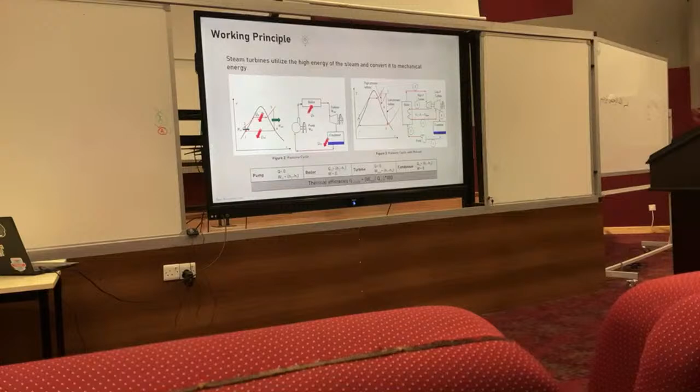Okay, Shabab, let's share the conversation. There is another question on the board. The application, where do you think this steam turbine is used?

So we start there: produce electricity. So in the electrical application, it is relevant. How does it produce electricity? Change the motor, receive the work, change it to electricity. The motor receives the work from where? From the turbine. Okay, good.

And anyone else want to try? We're going to limit to two for this one. Single stage turbines used in the industry or the plants as an alternative to motors. Excellent, both answers are very correct. Give them chocolate, they covered it very well. I cannot fault them. They got the fundamental definition of a steam turbine and the ways it's applied. That is correct.

Okay, right, we're still on the working principle. I won't be long here. So it is used as a prime mover because the gentleman started by saying there is mechanical energy available in the shaft of the steam turbine. So we take advantage of this mechanical energy he was talking about.

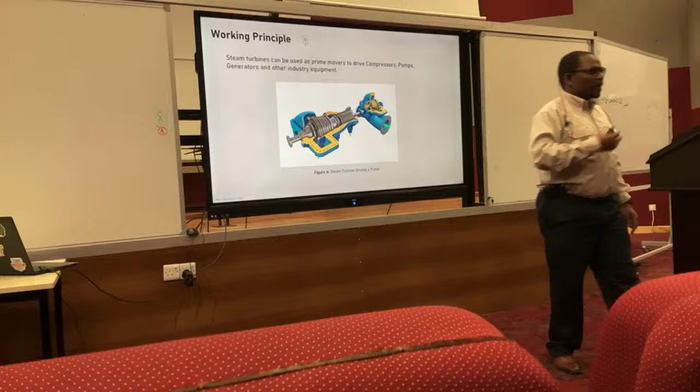We're then able to drive a centrifugal pump. We can also drive a compressor. We can then drive a generator. Now, depending on where the steam turbine is used, whether for power purposes, to propel a ship, in a nuclear boiler system, or a gas compressor, a steam turbine provides an option because the mechanical torque or mechanical energy is available.

So what you see in the picture is just an open, cutout drawing. These are the steam turbine blades, and you're all familiar with this, the impeller, this is a centrifugal pump. Later I will cover this in detail, do not panic, I'll get to the component.

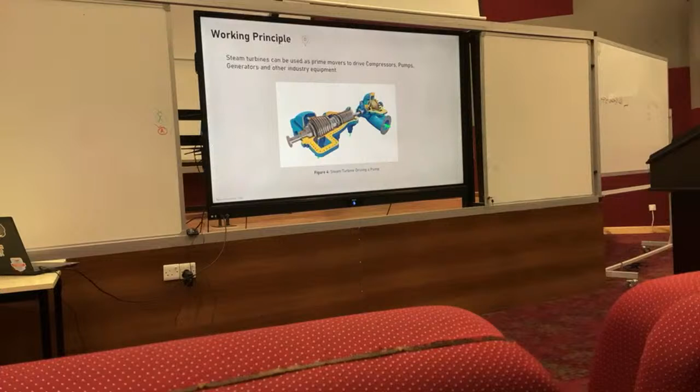Again, I won't be long, I think we all got the principle down. So I'm just showing another process flow diagram, how the steam turbine receives the steam from the boiler. In industry, we say it's coming from the high pressure steam header because the source of this high pressure is a boiler. Then we channel the steam into the turbine.

To get the steam, we have to go through the inlet valve. We've got the control valve, we've got the trip valve, then we've got a nozzle. Later you will get the knowledge of what this nozzle does. I'm sure you more or less got an idea.

Why I'm showing this, I just want to cover these three valves quickly before I go to the low pressure side. I want to cover the high pressure side with you quickly. The first valve you see, the inlet valve, is normally used during maintenance if we want to isolate the steam turbine.

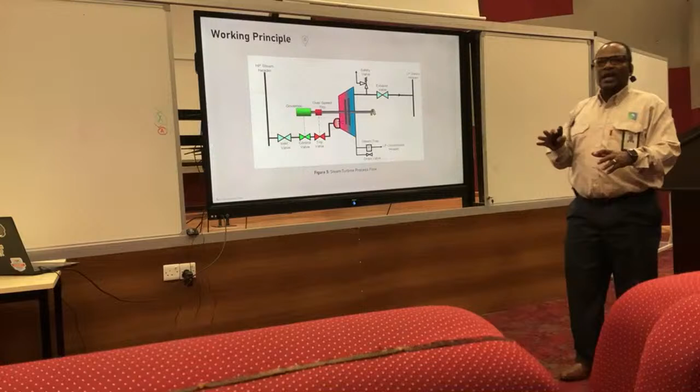But the next two valves, the one in the middle, we use to load or unload the steam turbine. There can be a case where the demand of the torque we talked about is not needed. So we tell the turbine, look, the demand is low, please reduce the steam consumption. It's such a flexible driver that we can regulate the steam consumption using the control valve.

The next valve is a no-go, it's called the trip valve. What it means, I'll put it another way and explain later. Think of a steam turbine as a crocodile. A steam turbine in industry can be a crocodile because most of them run at quite high speed, and if the speed gets out of control, you need to run away from the steam turbine because a disaster could happen in a minute or a second.

That valve design is very important because when it sees that the turbine is no longer controlled in terms of speed, it can immediately shut off the steam. Normally design engineers make sure that valve is almost on the chest, on the body of the turbine, so the volume of steam can be immediately cut down and shut off completely. We kill the torque, then we kill the speed. That is how we stop a steam turbine.

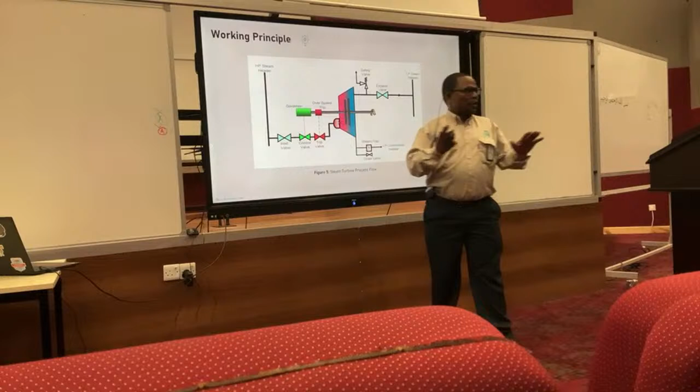Normally we do not want to stop a turbine this way, but this is an emergency when we are failing to get the turbine back into control. This is our last line of defense. Later I'll cover how we stop it normally under controlled conditions, when a decision is made to stop a turbine. There's a proper way to stop it, but that valve I'm explaining is for safety reasons.

Is the trip valve an electrical instrument or mechanical? That's a good question. This valve is normally linked with instrumentation, with very intelligent algorithm software, because in milliseconds it must stop the steam. The moment it gets activated, that's its job. But when the turbine is still under control, that valve is fully open, the turbine is happy and receiving steam as normal. It does no control on the steam. The owner of the control, this one, loads and unloads the turbine. That's why it's called a control valve.

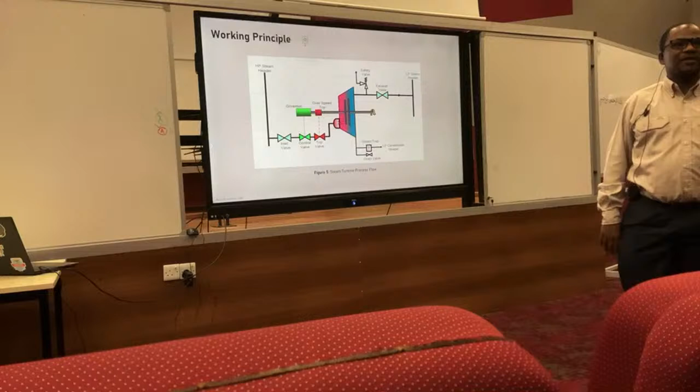When we pump the fluid, the steam, and get it to the turbine, and the control valve decreases the amount of steam, isn't that a waste of energy? There is steam available at the head of the valve, a mechanical valve fully open, but here we want to regulate the load. You cannot always think of it as a waste, it's still in a closed loop. All we're doing is using energy according to demand. This is an advantage a turbine gives us. We are not wasting the steam, but we are telling the boiler we do not want that many tons of steam at that pressure. We need a little bit lower because the compressor may require a lower load, or a generator requires it, giving engineers flexibility without wasting steam.

Okay, we good? That's the reason I want you not to forget the valve. We will get into the component later on.

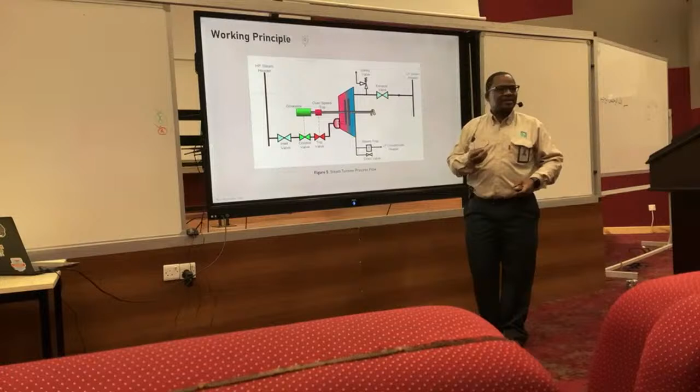Then when the steam is done, when we've extracted the energy from it, we return the steam to a low pressure system. If you saw the first picture, the principle, we could be returning the steam to a condenser and then back to the boiler. So this is really a line receiving low pressure steam. Later I'll cover all these auxiliaries, like what is the function of a steam trap in a steam turbine. And then I'll cover the nozzle also in detail. I'm just giving you a flavor of how steam flows from a boiler to the turbine.

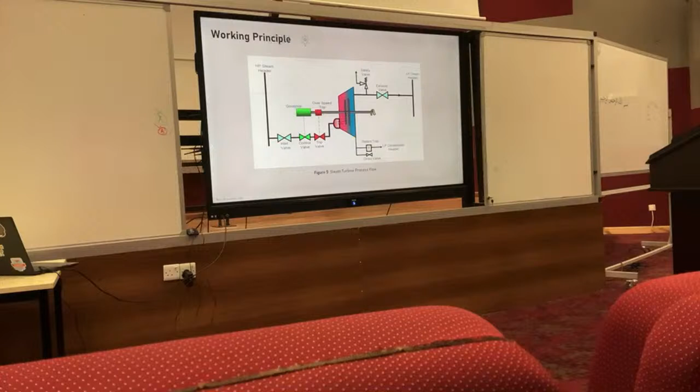So what do we think? I explained a little bit about the steam turbine, we covered the principle. Do you think it's similar to a centrifugal pump? Do they do the same thing? Who wants to give it a shot?

And when you give an answer, tell me if you say they're similar. Oh sorry, we have an answer. Okay, I forgot you already. We're going to choose right, yeah you can go ahead.

The turbine acts like a reverse for the pump. The turbine takes the rotational motion of fluid and puts it into rotational motion of the shaft. But in pumps, the reverse is happening: you take the rotational motion of the shaft and transfer it to rotational motion of the fluid.

To the fluid, okay, hold your thought, next try. Yes go ahead. Turbines deal with steam and pumps deal with the liquid phase. But the working principle, do you think it's the reverse? I want someone who can explain how it's the reverse, who can try? Turbine consumes the energy, but the pump instead puts more energy by increasing the pressure. The pump increases energy by increasing the pressure, it adds energy into the fluid.

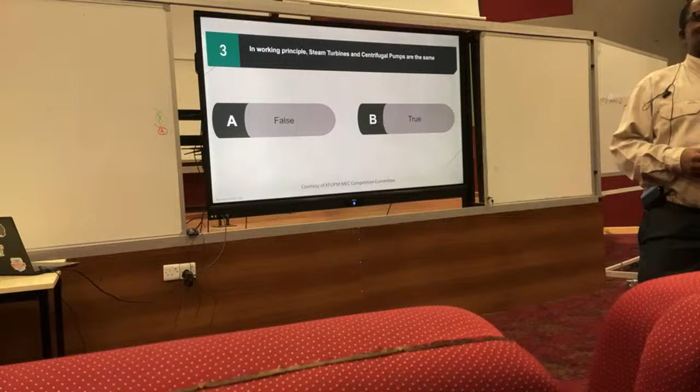Thank you very much, I think he deserves a chocolate, he really put it in thermofluid terms. A steam turbine is consuming steam from the boiler and then generates energy. The pump does the opposite: it puts energy into the liquid so we can go from inlet pressure to high pressure. The turbine is the reverse, it extracts energy from the fluid. Yeah, we get it?

Oh, I need to click the right answer from the laptop. Oh, from the laptop, sorry. Yeah, we're getting old with the technology.

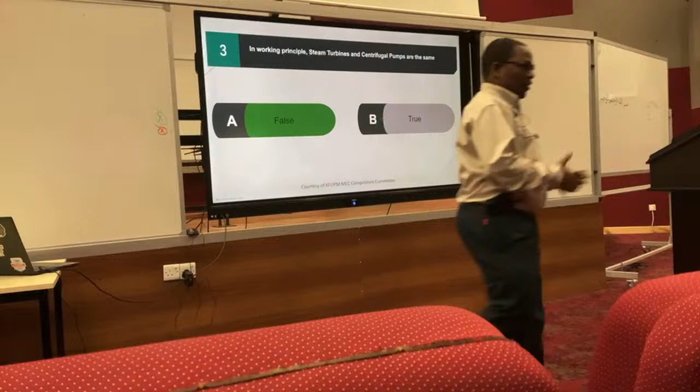Did it change the color? Right, so they are not similar. I'm just confirming he answered very well from a thermodynamics perspective.

Okay, we covered the components. So we did explain this. I'll try and take you through all the components of the steam turbine.

So what you see here, we have a shaft. We're already familiar with the rotor, we call a shaft. This is called a disc. Not sure, let me try and see if the laser can work.

So you can see, okay, it doesn't work on the screen. Let's try this way. This is a shaft. This is a disc. At the periphery of the disc, you've got the blades. These are the blades. You will cover them in detail later.

You've got a casing where you house the disc. You've got the seals where you prevent the leakage of the steam. It's a very expensive commodity of energy. We don't want to lose it. We want to contain it within the turbine so we can extract more energy.

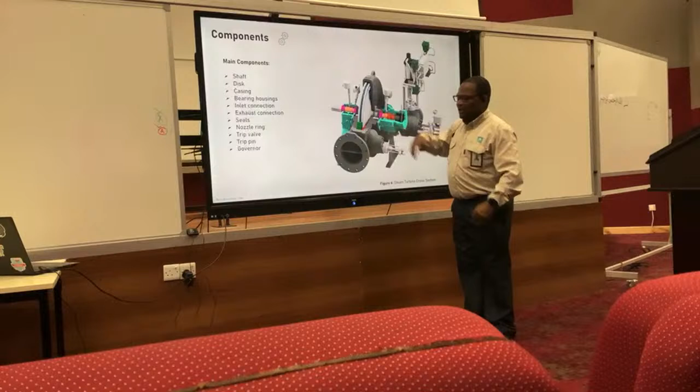Then you've got the bearings. They now support the shaft. The bearings have oil. This is a bearing housing, it has oil inside. We don't want the oil to go to the steam, so we put a seal to prevent the oil, and we have a seal to prevent the steam.

So we have a speed sensor. This is like gear teeth at the end of the shaft. This is your speed sensor, to measure or monitor the turbine RPM. Why? You saw that, you remember the picture with the red valve. This is important. Any turbine that we operate, it's important to keep track of the speed.

And then this is your control valve, your trip valve, control valve. We're telling it, this is how much load we now need, so that the torque available here can meet the demand. Then I go back quickly to the component.

I've covered the seal, the exhaust. So low pressure steam, connected by a pipe, we take it back to the condenser. High pressure steam on the other side, that flange, that is called the inlet connection. The steam is coming from the boiler. I've covered the bearing, I've covered the trip valve, and then we have a governor.

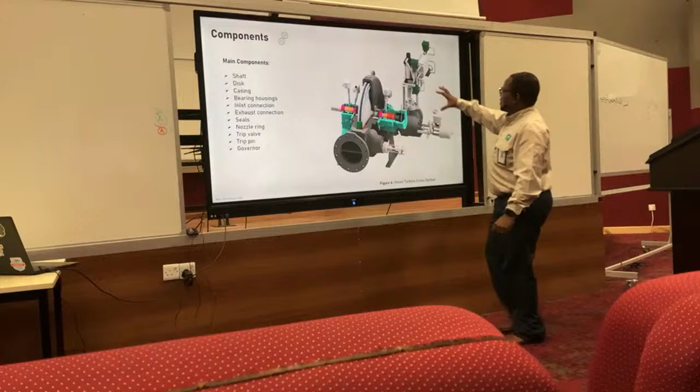This is a governor valve. Later on I will go into detail. And then inside here there's a special device, very important, called the trip pin. I'll cover again how it works. Basically it's the last thing - when all this instrumentation fails, then it's more like a mechanical trip.

So you can see already that we're all worried about the speed of the steam turbine. We want to control the speed because, as I said, if we don't control the speed, things can quickly go wrong. Is there any question on this, on the previous component? Was I too quick with the components, or is it okay? It's okay.

Okay, now we look at the classification. I'll go through it quickly. Turbines are classified as general purpose, special purpose - I'll explain quickly what that means. Then we'll look at the number of stages, single stage, multi-stage, and I'll cover the concept of why we have it like that. Then we've got condensing, back pressure, extraction - I'll explain that. And then compounding, I will touch on that as well.

And then the types of governors, I will explain. And then we'll look at the impulse and reaction blades, and cover how an engineer decides which blade to use, which one not to use in a certain application.

I keep using the word engineer because in my future, when I see all of you, I see our future Mohandis. This will be all relevant to you in your future. If you do well in your examination, I'm sure you will do well. These are the things that will start helping you with your career decisions as well, okay?

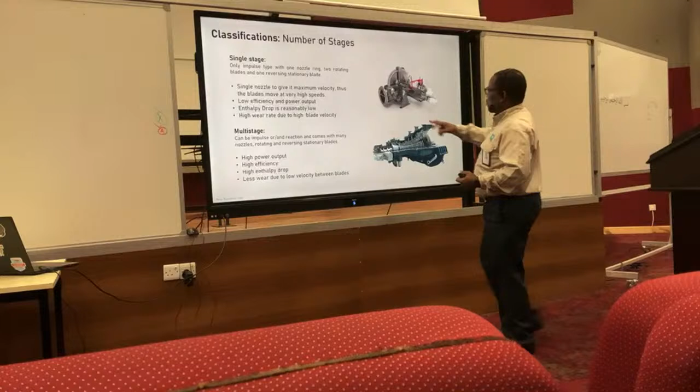Okay, we are on the stages now — single stage or multi-stage, that's how you can classify. There's a limitation on the single stage, normally it has one nozzle. Sometimes what we do, what you see here, we call it hand valves — these valves on top of the control valve going to the steam. Sometimes when you want to maximize a little bit more, we either fully open these valves as well to let more steam, or channel the steam more around the disc to get more torque so we can fully utilize the steam. Really, a single stage is limited — it has one nozzle ring and the disc runs at high velocity, and you will see that later on.

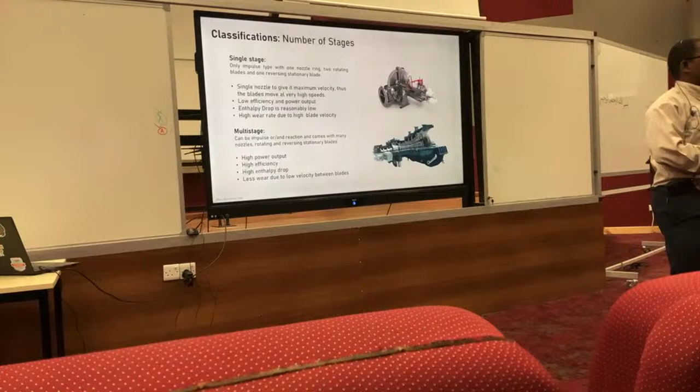Then we come to the big boys, we call them multi-stage. We call them multi-stage because they are designed for high power, high efficiency, and huge enthalpy drop. When we say huge enthalpy drop, it means we maximize the energy. We sweat the steam, we consume the steam that the boiler provided. Then this turbine is able to deliver the torque that is required. How do we achieve this efficiency? You have a number of blades, so you create pressure drops and velocity changes so that the power from the turbine is really fully utilized.

Later I'll get a bit more into detail on multi-stage and all the blades in the turbine. But the picture you see on the right below, you start seeing a big specialized steam turbine. So far so good?

Is there anything else we need, did that answer it a little bit for now? You will see the calculations later, but you get the feel for how we get high efficiency on a steam turbine.

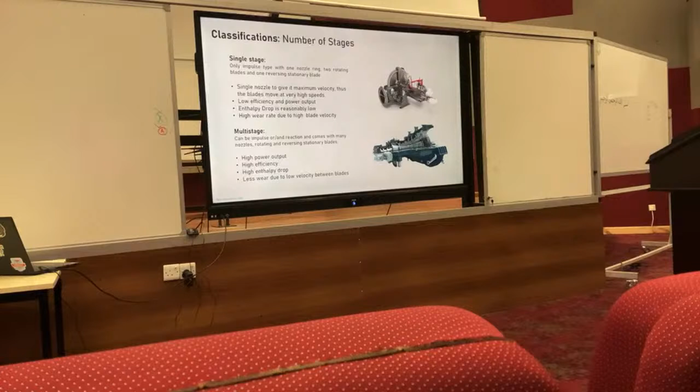Single stage again, these are just components. I stress again, as a single stage turbine, we have one disc or one nozzle ring. We are limited with the torque. We are generating the torque required for that specific need, but if we want to stretch it higher, we then need to consider multi-stage.

I think I covered the components. I can recap if you still remember. This is a bearing housing. There's oil, we've got seals. These sensors, this one could be a temperature sensor on the bearing, so we are monitoring the bearing.

The other one coming at this angle, we could be looking for vibration. So there are some sensors other than just speed, we can also try to monitor the vibration of the whole steam turbine. I'm not sure if there is more.

I'll cover the reversing segment on the blades later. This component helps the first blade that received the steam transfer that profile again to the next blade. That's why we call it the reversing segment, it helps transfer kinetic energy to the next blade.

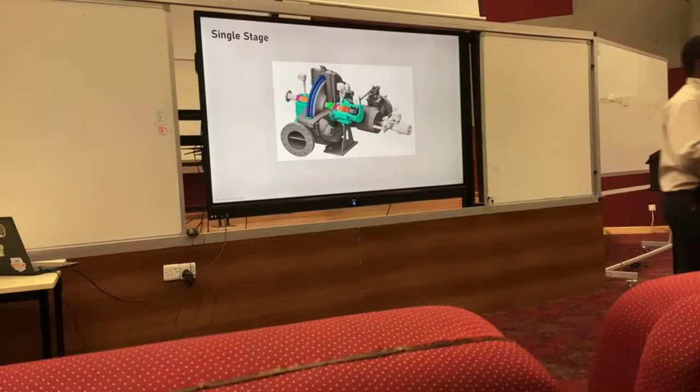Is there anything maybe that I didn't cover here? I did mention these are hand valves, or sometimes some turbines have an option to put hand valves, so that's why you don't see that. This is used to supplement and maximize the torque available by bringing more steam into the turbine.

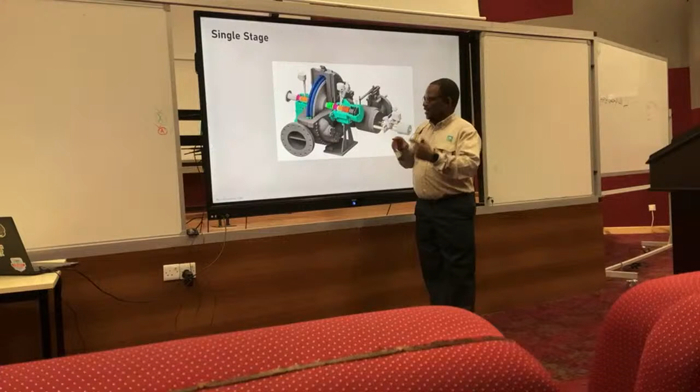What is the nozzle? Maybe because of the pictures, I'll explain it later on. The only way to identify where the nozzle is, you see the steam enters here and takes this direction to the turbine. There's another drawing coming where you'll see nicely how that nozzle ring sits in front of the disc, because it has to control and channel the angle of the steam so you can strike the blades optimally to get your kinetic energy when you need torque.

Is there a question, Shabab? Does somebody have a hand up? Is all good so far?

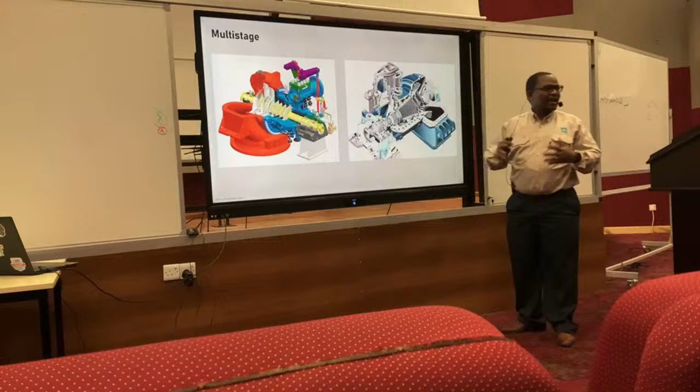Okay, multi-stage, we've explained again, so you can see the shape of the turbine, tapering in. I will explain what's the secret behind the shape, but one, two, you can see now the blades, you can start getting a feel for what we mean by multi-stage, and why it's called a multi-stage.

What you see here and here is the control valves, they are in the body of the turbine. I did explain it's easy to control the steam this way. Also, the trip valve is mounted, we call it a chest, the steam chest.

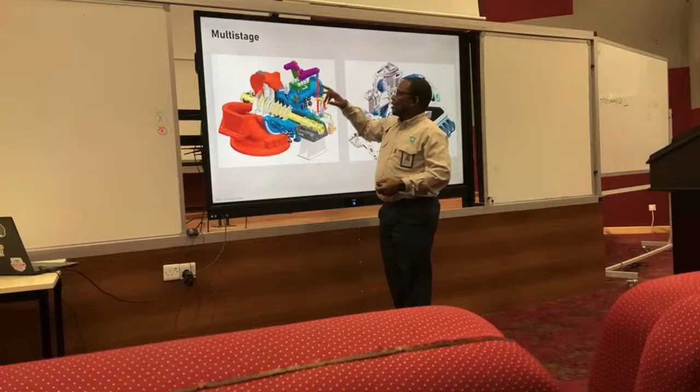It's also used so that when something goes wrong and we want to take action quickly, within a second we cut out the steam. You can imagine if this valve was in this position and we have to immediately stop the turbine, when we trip, there will be steam trapped between the turbine and the valve. This steam will continue into the turbine, and since it has energy, it will continue spinning the turbine, which is the last thing we want when the reason is to stop it. That's why engineers mount it directly into the body of the turbine, so there is no volume of steam available when you have to stop.

Is that clear? Okay, any questions so far? Are we all good?

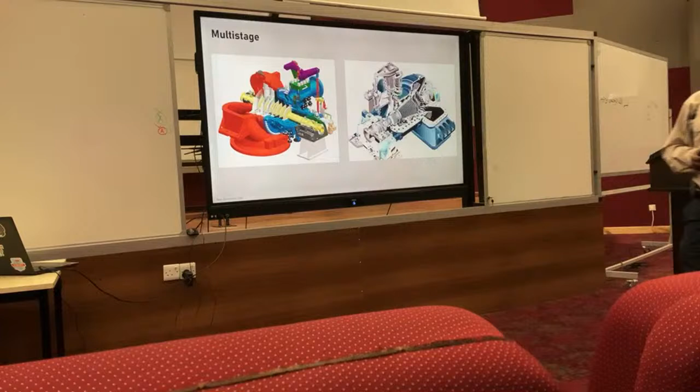Because the pressure at the beginning is higher than at the end. So why is the blade long? Yes, very good, the pressure inlet is higher than the pressure outlet. But why is the blade at the end long?

Not far, not far, so you need to trust yourself. I think you got the concept. Why then is that blade longer?

I wish I can give him half a chocolate, but I'm not allowed to cut the chocolate. Go for it, give it a shot.

At the last stage, the pressure will be little compared to the beginning of the turbine. And if the pressure is low, it is harder to extract the energy. So you make the blade longer in order to extract the energy.

Give it a try, the last one. I think it's because the volume of the steam expands, so we need to expand the chamber of the turbine. Excellent, please, we'll limit to 3 for now.

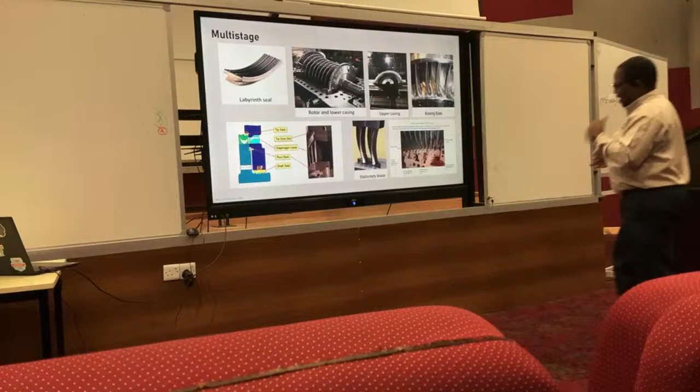Okay, I will wrap up very quickly here. I'm just emphasizing the component on the multi-stage that you will find. You will find the seal, what you see, the labyrinth seal.

Again, a very expensive commodity, high efficiency. We don't want to lose this, we don't want to lose the steam, so we use this seal to prevent any leakages.

So if you want to see it more clearly, the steam can go through at the top of the blade, it can leak through there. So the engineers came up with what is called a tip seal to minimize the leakages. The steam can also go past at the shoulder of the rotor, so engineers came up with what's called the shaft seal. All these functions really are to enhance efficiency, so that you don't lose energy.

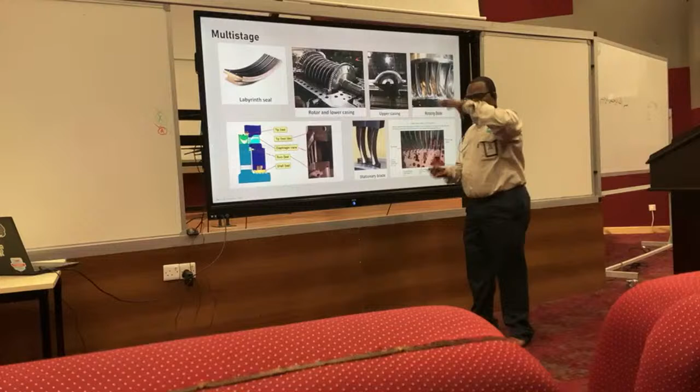This is just another picture showing you how the rotor looks like. So this would be a casing, this would be a rotor. The casing now in the top position because it's an axial split. So the top casing, when you close this, parallel to the shaft and the line I already covered, what you have, which will be clear later on.

We have what we call diaphragms. You can think of the diaphragm as the divider. There would be one rotating blade here, then two diaphragms, one blade here. We call it blade or blade carrier. So you will see in the next picture.

This is a stationary blade, these are rotating blades, they have that profile. That profile engineers came up with is for aerodynamic purposes and the efficiency of converting kinetic energy to torque.

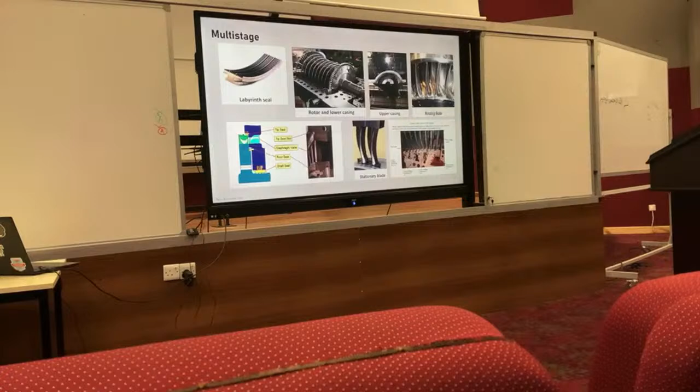This is a diaphragm, so this is another picture. What I was trying to explain, these components are called diaphragm compartments. They are not rotating, they are stationary. They support bending moment or bending stresses. They support the rotor. They've got diaphragm rings to channel the profile of the steam to the blade. That's basically their function, to house those rotating blades.

If you make a mistake on installation, and one of them is turning and touching the diaphragm, that could be a disaster on the machine. You can destroy the turbine.

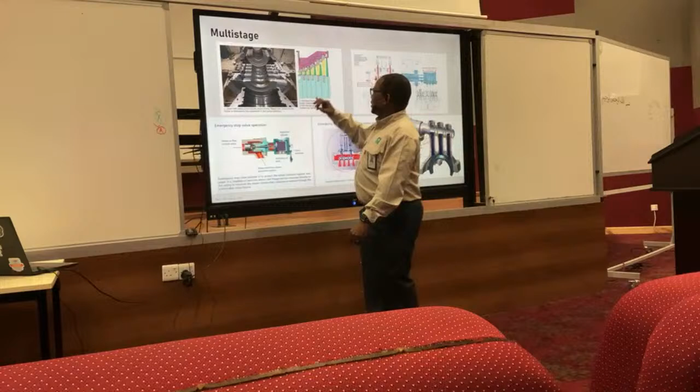And this one was just trying to show you - so the yellow and the gray is not rotating, stationary, 0 RPM. This color is a blade, that's the one that is most of the time subject to centrifugal forces or torsional stresses, whatever the engineer needs to worry about.

So this is basically trying to show you how this looks like in cross section. And you remember we asked why that blade is longer at the low pressure side of the turbine. So far so good. Let me cover the important component as well.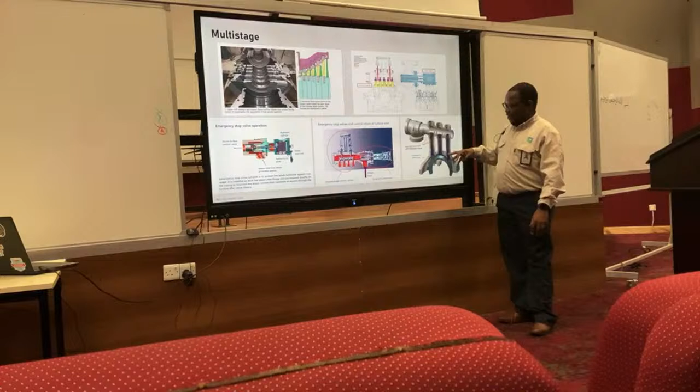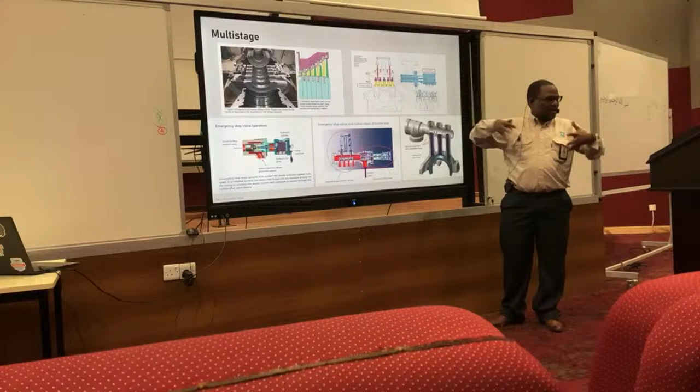We mentioned that in the chest of the turbine we need to control the load. We use this valve to regulate the steam. There is a sequence for how we tell the control logic which valve number, which rack number, needs to be fully open, and which one needs to be held 50% open, because we are playing with the load to meet the demand. That's how the steam control valves really work. They work like a camshaft of your car. That's how they sit on the chest of the turbine, for load control purposes.

This guy is either happy and open, or somebody tells him to take an action now. When he takes an action, you blink your eyes and the steam is closed. This is the function of this valve. We call it the emergency stop valve. So far, so good.

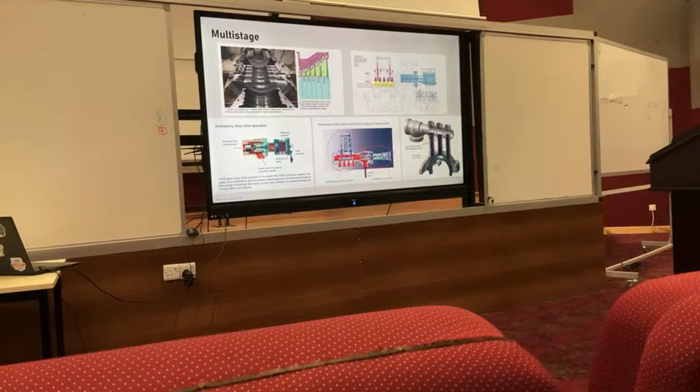Okay, Shabab, remind me with technology.

Which of the following describe a single stage steam turbine? We want to give it a go. Which answer should I select? Who wants to give it a go? Yeah? C. C is the answer. Oh, I need to go there.

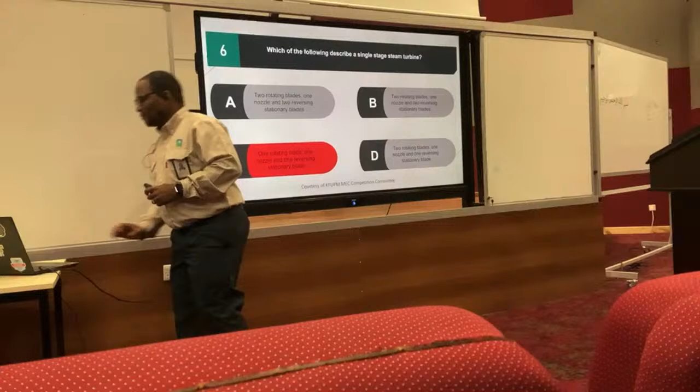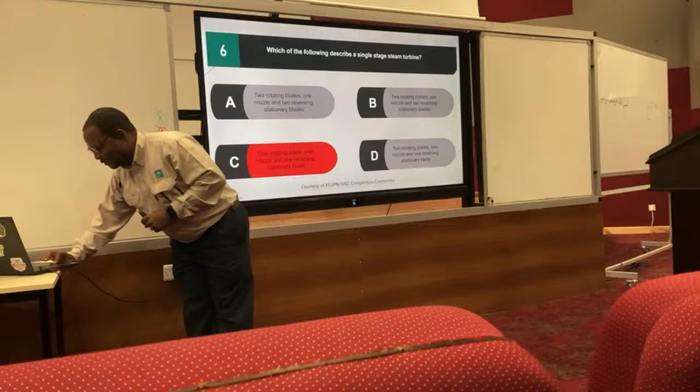Anybody else want to give it a go? I did cover single stage, multi-stage. Who wants to give it a try? Which of these define a single stage steam turbine? Okay, give it a go, yeah? D. Oh sorry, I keep wanting to go there. Excellent, give him a chocolate. One nozzle ring, two rotating discs, the one I showed in the picture, and reversing to transfer the steam to the next row.

How are we doing, Shabab, with time? Is it okay? The pace is a little bit slow. Let me know when I need to.

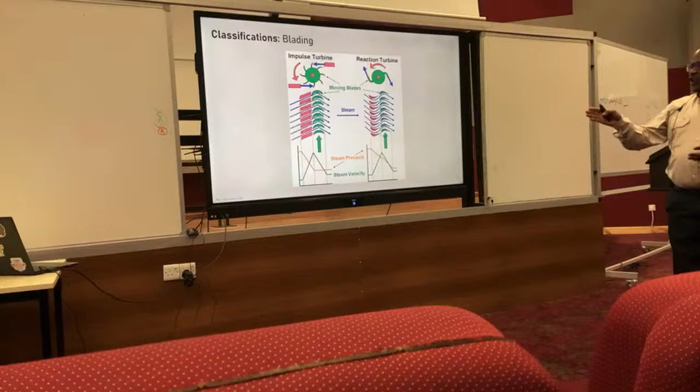Okay, we talk about the blading, so we're looking now at impulse turbine blading and the reaction type. Very quickly, if you look at the picture on the left, you see a nozzle. We use this nozzle to drop the pressure, so that we can get the kinetic energy. If you look at the graph, watch how much the pressure is dropping, and watch what the velocity is doing when we hit the blade. What you're seeing is half mv squared, that's what we're looking for, so that we can have a torque.

So in this type of turbine, the only pressure drop happens here. This is the only component that is designed and used to break the pressure so we can get it. You can see right at the end, as you go through the stages, the pressure sort of remains constant.

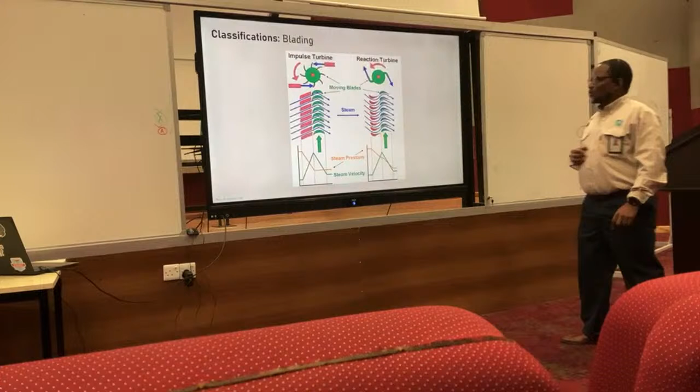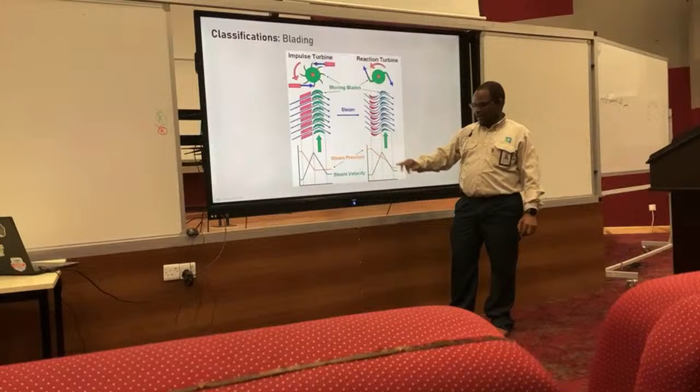Now let's turn the focus to the next picture on the right. You can see this segment is fixed, not rotating, and this one is rotating, and you can already see the profile is not the same, but you can also use this drawing. We have a pressure drop before we enter this blade, but you cannot compare it with the left side. You can start seeing the difference. There's a velocity increase, but again you cannot compare with the left-hand side. But you can see they start complementing each other, meaning they are sharing the pressure drop.

The reason engineers call it reaction is the drop happens on both components, kind of like a 50-50 pressure drop. Then they came up with the 50% reaction turbine. When we go deeper into design, one of the disadvantages of this turbine is it tends to introduce a lot of thrust or axial forces. In big turbines, you will see they even design a balancing drum or balancing piston to manage or cancel out the thrust forces, so it has some design challenges.

Also, for special purposes, engineers can combine these two design concepts in one turbine to meet a specific design goal. So you can have a blade that looks a bit like an impulse blade, and as you go deeper into the turbine, you can play around with the blading arrangement depending on the application. Any question on the blading?

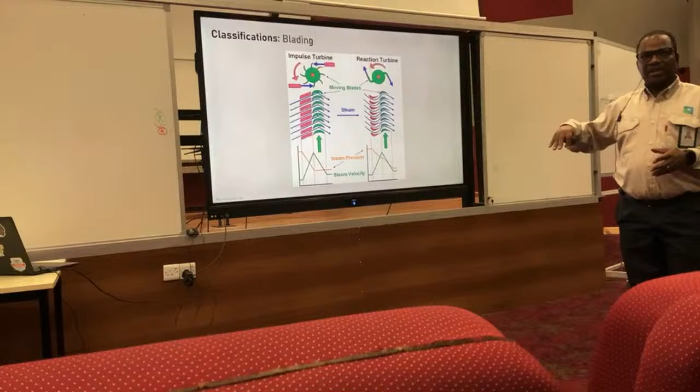What's the difference between them when choosing a situation? In general, for single stage, we stick with the impulse. You'll see later on the next slide, which will answer your question a little more. But for low pressure application, low horsepower, you normally purely stick to the impulse. Let me show you why.

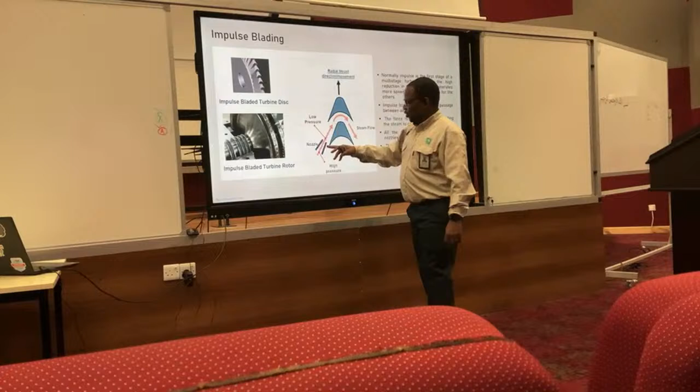I have a table where I list the differences between the impulse and the reaction. As I explained before, you can see the profile of this. You break the pressure on the nozzle. All we need here is really the high kinetic energy, so we don't break the pressure further, we break it once through the nozzle.

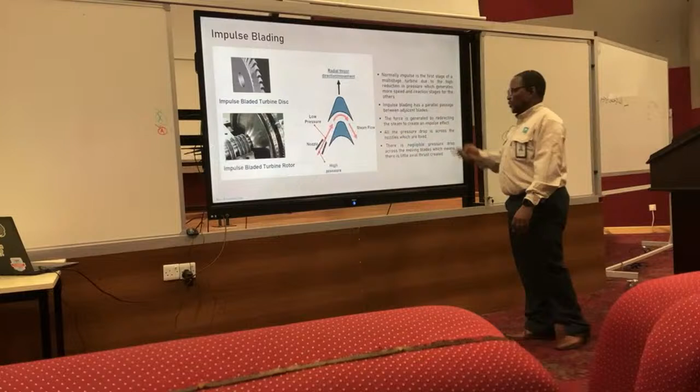Okay, this is a reaction. You can start seeing the difference quickly. Look at this shape and look at the next shape. Look at the blade, and you look at this blade. Can you see the difference?

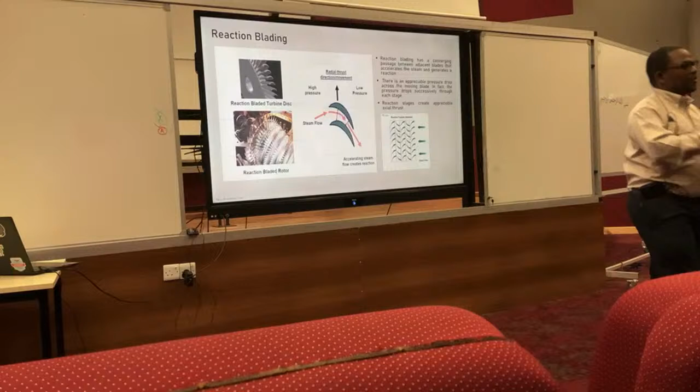Okay, give you some time to see. I can move on if there's no question.

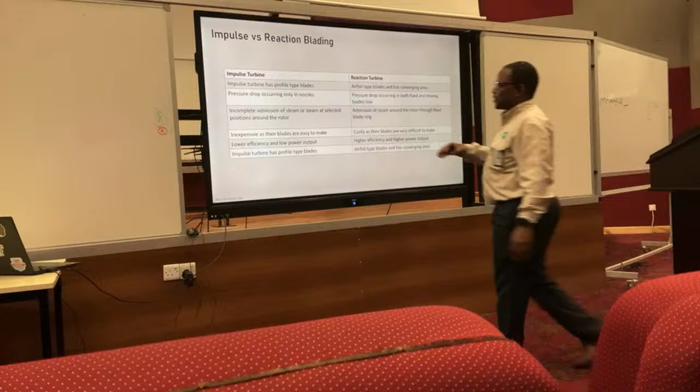Okay, he asked a very good question - as an engineer, how can he decide whether to just use the impulse, with pressure drop only on the nozzle? Another thing is that because it's general purpose, really the efficiency might not be that important - it's a small power output. And also I'm looking for the cost.

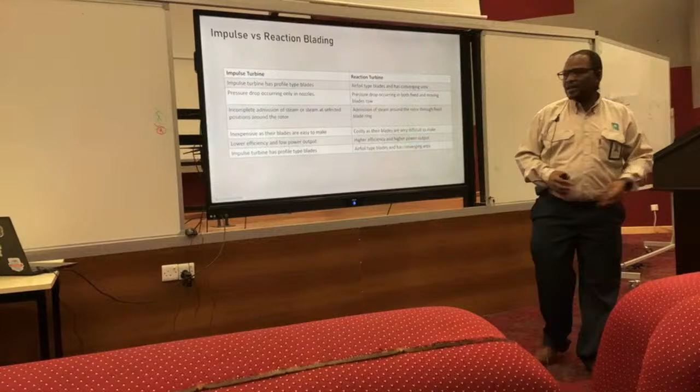So to manufacture that profile, design and build that blade is not expensive, compared to when you have to design the blade for a reaction turbine. Because with the aerodynamics of that blade, you need to take note that you want to minimize the thrust forces on the steam turbine. So really you want to break the pressure 50-50 between rotating component and stationary, but you're also mindful of the thrust forces that can be generated by the reaction turbine. That's why coming up with the blade on the reaction turbine is a little bit of an involved design process.

Any questions so far? Okay.

Okay, which of the following is not a type of a steam turbine? Who wants to give it a go? There are things written here - some of them we are saying it is not related to a steam turbine.

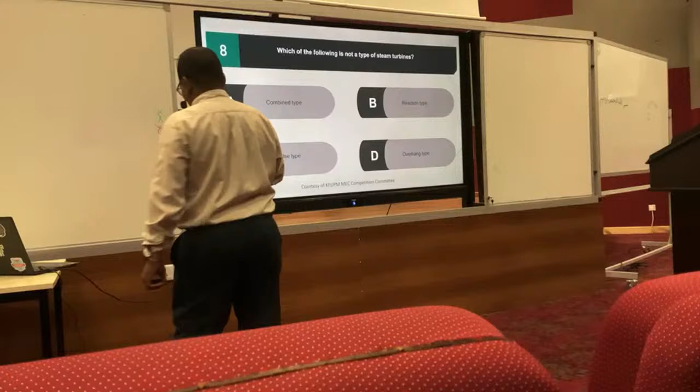I need to distribute the chocolate in the right sequence, right? I'll start with the gentleman on the right on the top. Yes, go ahead, give it a try. B, B for Becky, eh? Let's try B. Who else? Right at the top, the gentleman in the navy t-shirt. D, let's give it a try. Why do I like D? Do I also know something about D? Okay, give him a chocolate. Thank you very much. Okay.

All right, according to how we exhaust the low pressure steam - when we say exhaust in a steam turbine, we are already talking about a very low steam pressure. When we say high pressure, you'll hear engineers in the field say HP side means high pressure, LP is low pressure. So I'm showing you an example of 3 turbines. Some turbines, especially in the power generation industry, the way they use and extract the steam could be a little different. But the common one is the condensing type of turbine.

You saw it on the Rankine cycle. We extract the enthalpy - when we are done with the work and we avail the torque, we then drop the heat sink on the condenser. We then return the steam to the boiler. Then it's a closed loop.

The other type of turbine has its disadvantages - it's a back pressure turbine. Back pressure turbine is that line you see on the HS curve. It tends to discharge the steam, and the steam still has that energy we're looking to extract. So it's not really a very efficient steam turbine, but that does not mean it's not a common turbine. Compressor drive is a normal turbine that you will find in the refinery.

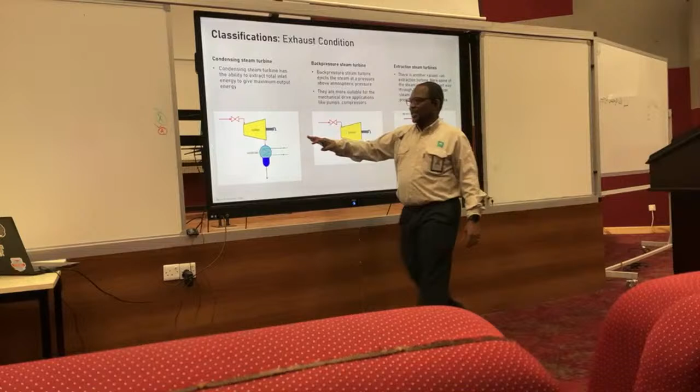The reason in the refinery the steam requirement is sometimes different. You've got heating processes, you've got letdown stations required. So sometimes the back pressure turbine finds its place. But when we really want to maximize the steam energy or efficiency, the condensing turbine normally becomes the candidate because it has a full enthalpy drop, dropping the pressure below atmospheric.

That means we really extracted all the energy from the steam. This one you can also find, but it's not common in the refinery, where you have to have a high pressure somewhere in the stage. You want to extract the steam that still has energy because maybe we want to heat something else in the process with that steam. We call it extracted steam, so it's an extraction, and then we still continue to exhaust to a condenser.

So again, an engineer comes up with it because there is a process requirement, maybe in this steam turbine I can get the steam still at high pressure and use it for a process need, but I have not compromised the torque required for the primary function. So this is a range I can share. They are all applicable, they all have their needs in the industry. They are basically a design decision for the engineer based on the process requirement. Any questions yet? As I said, nothing would be strange.

In the thermofluid, you've now had the word condensing turbine, you've had the word extraction turbine. Also, when you do performance analysis, the approach in enthalpy is the same, but you need to be very careful with the parameters, how you group them to work out efficiencies. I'll show you later on.

Isn't the back pressure steam turbine line going to a condenser the same as the condensing steam turbine? The reason we call it back pressure is we discharge the steam at high pressure, so we cannot have a condenser. A condenser is more like a heat exchanger designed for vacuum purposes. So now I cannot have a pressure into that heat exchanger that is high, because then I could easily exceed the pressure capability of a condenser, also for cooling or condensing purposes.

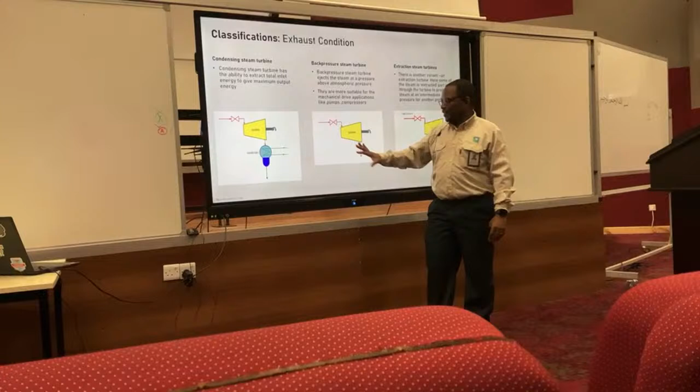So where I used to work, we will take the steam to the letdown valve or breakdown valve stations, because they need that energy in the steam. But you should never think of a condenser here. When you see a back pressure turbine, or someone tells you that one is back pressure, you know there is no condenser. We're discharging the pressure, releasing pressure still with high energy content. So that's why I'm saying it's not really economical, but it has its own place in the process industry.

So far so good with exhaust classification of steam turbines. Any questions? Is it adding up? Do you remember anything in the book? Can you relate now? Is it helping?

In the extraction steam turbine, one of the lines goes to a condenser. Yes, so this could be blade number 3 on the multi-stage. An engineer could decide I want to extract the steam at blade number 3 because the pressure there is still very high, so I can get that heat content and use it somewhere else. But you are not saying I cannot continue to perform a function that looks like this. So post blade number 3, we can continue expanding the steam, condense it, and then loop again, and it becomes a closed loop. So it's a good question, yes.

Okay, is there a question, are we good? So then we have different types of governors. I talked about the governor. The best way to explain to a future engineer what a governor is, I can explain it with this concept.

When you drive your car and you go uphill, do you press the pedal, or you don't press? If you don't press, what will happen? Who can answer this question? Now you are driving your car up the hill, you lift your foot off the accelerator, will that car go over the hill? Why can't it go over the hill? Because we have gravity, we have nothing to react to it, so there's something resisting the car from going over the hill. But if you press the pedal, you will be able to go over the hill.

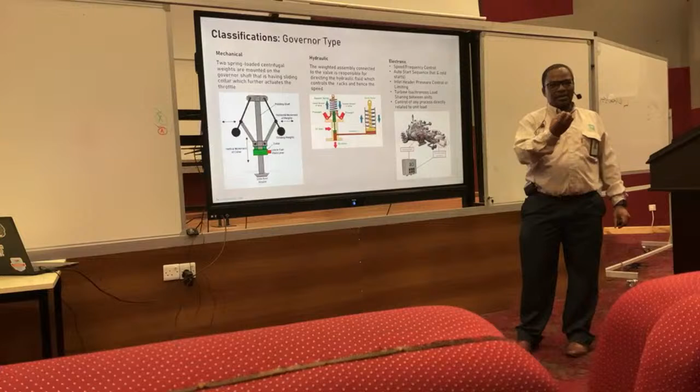The governor helps us control the load of the turbine and also control the speed of the turbine. So if we need a certain amount of speed, the governor helps us regulate it. It's really a device used to regulate the speed of the turbine. That's why I use the car as an example.

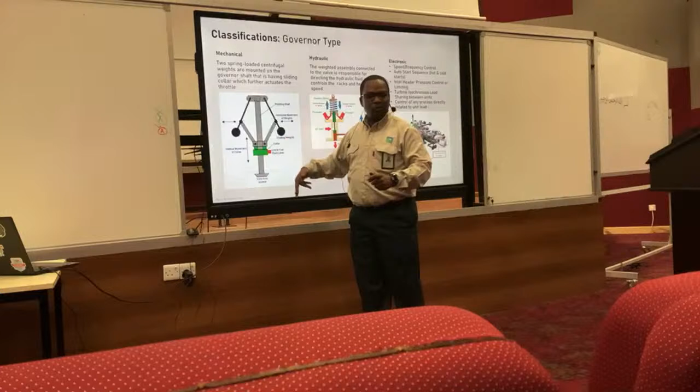In the old days, there was a mechanical governor. It works on centrifugal force. When the turbine is spinning, these weights stretch apart when the speed is too high. When they spread apart, they push this lever down. When that goes down, it hits a trip pin on the governor, and it trips the turbine. That's how the mechanical governor used to work.

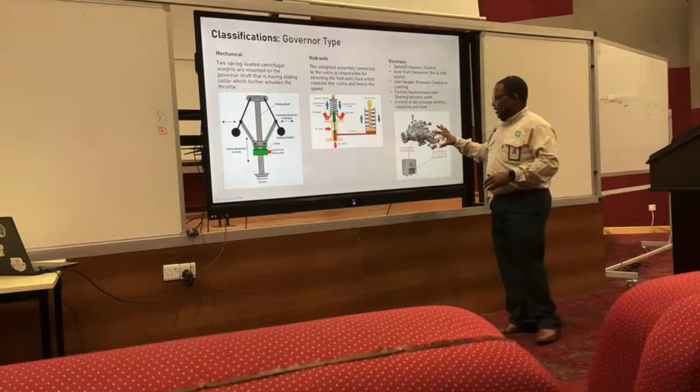Then engineers improved the technology, and we came to a governor called hydraulics. We make use of hydraulics to control the opening and operation of the governor. This technology is still common on general purpose steam turbines. You can still find a hydraulic governor, but on critical and special purpose turbines, this one is more reliable because it works on the intelligence of the control and management of the turbine's speed.

It's not only this one, there's more in the market already available, but these are the common types. In turbines, the electronic governor tends to take more favor among engineers, especially in special purpose and critical applications, because you don't want a mistake when you make a call to cut the turbine. You need to know your speed very well. Any questions on the governors?

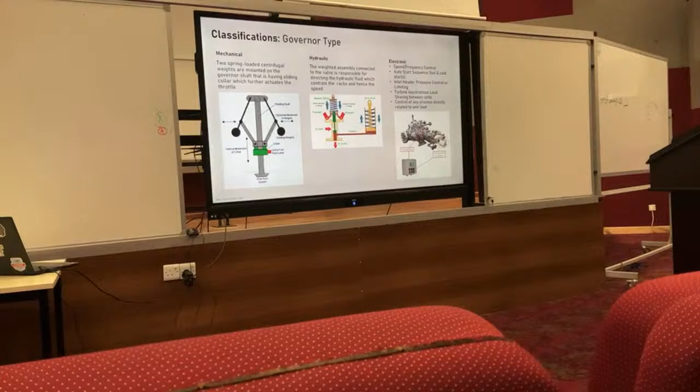Okay. Good, somebody's turn now to engage.

The electronic governor is more accurate than a mechanical governor.

Let's try and distribute the chocolate again. The gentleman on the top, white t-shirt. What's the answer? B. B. Okay, give him a chocolate.

That's true. As I said, technology and algorithms to control the speed with sensors is quite important, so that governor becomes more accurate than the mechanical or hydraulic governors.

Okay, we are now in the stuff that you now need to teach me, so I won't spend a lot of time. I'll learn from you because I don't know how long I've left the academic, but again, this is very important. Why I'm having this with you today is because in the industry, I still use this.

When I have a task as an engineer to work out the steam turbine efficiency, if I don't know this, I will be making a lot of mistakes when I do the calculation. So this is very important, but you will help me, we go through it quickly.

When the steam goes into a turbine, it has a state one. State one could be a function of P1 from the boiler, T1 from the boiler. We take those parameters, they become an input into the steam turbine. So we all know now that enthalpy is a function of these two parameters, that's correct? So how will I get the enthalpy?

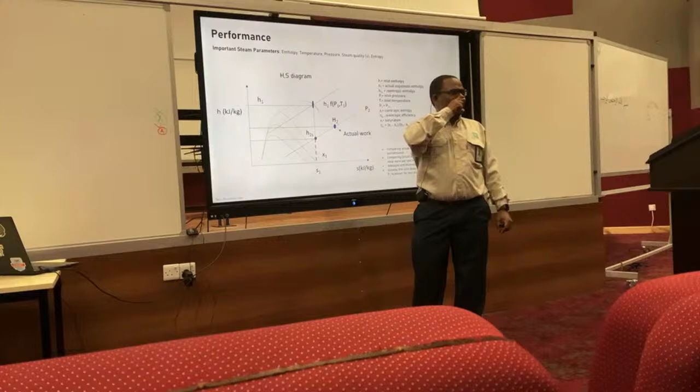How will we know we should go to a superheated region? How will we test that? The gentleman at the top, yes? If you are above the saturation temperature, it will be superheated. Okay.

Take note of what he just said. He made a very interesting rule: if T1 is higher than this, we cannot be in the saturation region, we have to be in the superheated region. Is that what you're saying? Give him a chocolate. Keep that in mind.

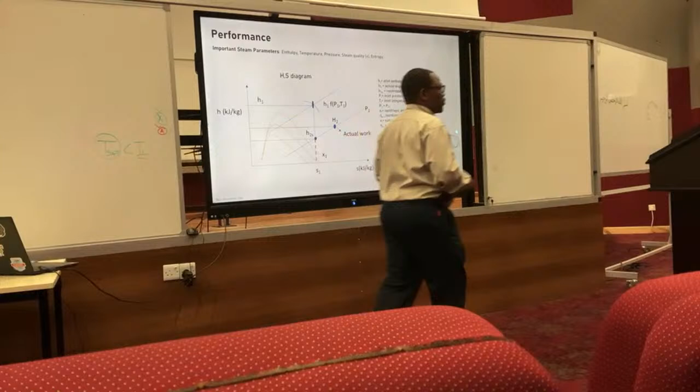And then H2, how will we calculate H2? We want to give it a guess. Before we go to H2, can you remind me what this line is called? What is this line and why is it straight? You will get 2 chocolates if you can answer me: what is it and why is it straight?

This side is taking a lot of chocolate, so I want to avoid it. I want to distribute the chocolate.

Yes, go ahead, sir. Straight because there is a path. This line, from this dot all the way to S1, you're saying it's straight because there is a path, there is a valve. What is the valve doing? Increasing the enthalpy? The valve is decreasing the enthalpy. Hold the thought, let's give it a go.

This is an isentropic process. Isentropic, very good. And what is isentropic? What do we mean by isentropic? Who wants to supplement him? He will get the chocolate, he has a good answer. Who wants to supplement and support him? Why is it called isentropic?

No heat. There is no heat. Excellent. So there is no heat transfer. The process is adiabatic, right? So give them both chocolate, right?

That's the advantage of this: it then sets up very quickly to work out this isentropic enthalpy. But let's just remember, in the real world, the steam doesn't do this. The steam does this, because inside the turbine there's friction, losses. So this concept here now, it's a reality. This is real in the turbine, in the steam turbine.

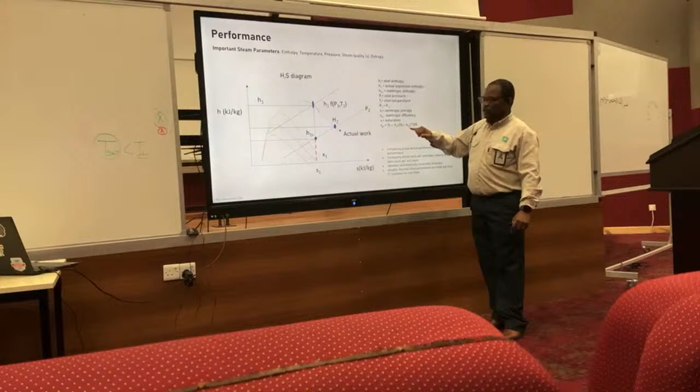Once we found H2, we are then able to calculate efficiency because we now have all the enthalpies. So H1 minus H2, H1 minus H2S, that can give us now a turbine isentropic efficiency. Good? It's important to remember this.

And then, as I said, this line, if we really land in this range, it means we have taken the energy from the steam. We do have an efficient turbine, we extract the energy. Any question here? But this is your area of comfort, I don't need to spend time here. It's just to refresh, because later we're going to work together on the calculation.

Okay, so we have an example. Because of the time we don't have to calculate in detail, it's just an interaction. You are an engineer, and it's a back pressure turbine. Let's go very quickly. You are being asked to define the inlet parameters and exit parameters, and tell somebody what is the efficiency of this turbine. And somebody wants to have a compressor - he wants to know from you whether this shaft, this torque, is suitable to drive this specific compressor.

How will we start? We now know the inlet pressure is 4,000, and the inlet temperature is 400. What can we quickly find with these parameters? While I draw, someone can help me give me the answer. Find the enthalpy - we can find the enthalpy.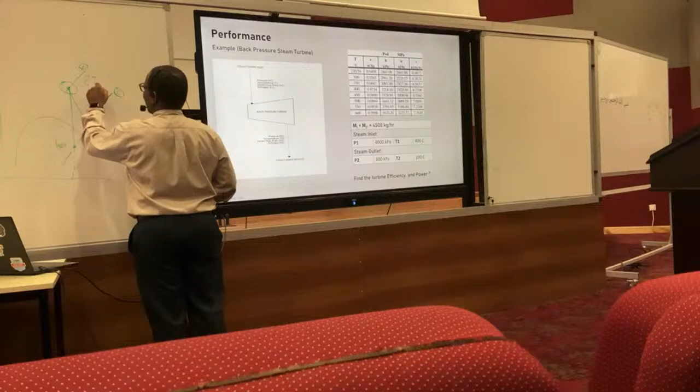How can we quickly find this? How can I go up? But I have a steam table here at 400. The temperature is 400, the pressure is 4,000. What should I do quickly? Here's the steam table - who can help me quickly go through this?

We want to give it a try. We should be within 2 minutes for this because we all got thermofluid exposure, right? We should go through it quickly. So we know the temperature and we compared - you remember this rule? Did I erase it? No, he made a very good rule. T-sat and T1: our temperature is 400 degrees at that pressure.

And this pressure is here, so that's 4 - that is the same as the 4,000. How can I find H1? What is H1? It's right here.

We have an exercise later - I just wanted to use it to engage them quickly so they can refresh. Anyone want to give me quickly, what's the enthalpy? Yes, go ahead. 3,240. Very good, so we have H1.

So H1, can someone write for me? I need to be very efficient with time, I'm mindful with time, so keep that number in mind. So we have H1, 3,000. So how did we find H1?

400 was the temperature inlet from the boiler, and the gentleman knew that this is the saturation temperature at this pressure. Then he quickly checked that temperature is lower than 400, then he knows okay, this must be a superheated steam table - that's how he identified the H1, okay? Very good, this is the right concept.

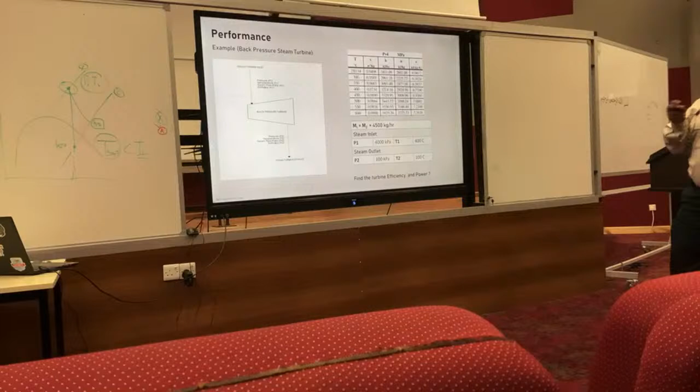So what we'll do is, if we need H2S, we want to use S, because we said that line was isentropic. So we need to quickly say S1 has to be the same as S2, isentropic. So we now know we have S1, so we can read S1 - this is our S1, but that's not enough to calculate H2S. Now something else we need.

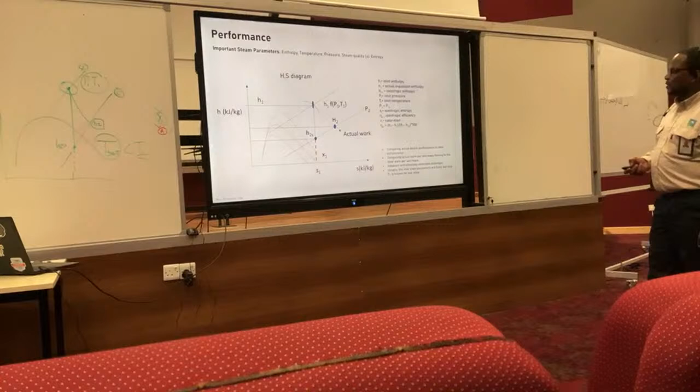If we go to the saturated table and the temperature at this pressure is higher or lower than this, it means we can't be in saturated, we're in the superheated region. So we still need to go to a saturated steam table, but for this pressure, to identify the entropy at the saturation, so that we can calculate X. Let's see if I brought the equation to calculate X, just to remind you - I didn't, I think I can go back. Did I show you how you work out X? No, I didn't.

To define X, we take S minus SF, that's saturating, and divide it by evaporating entropy, SFG. That will give us the X.

Why we need X: we then go to a normal saturated table to read the enthalpy for the liquid, HF, and we get HFG. Then, with X, we calculate H2S. Then we need H2 — these parameters are the actual expansion, so we can use the pressure and T2 to get the actual H2, not the isentropic H2.

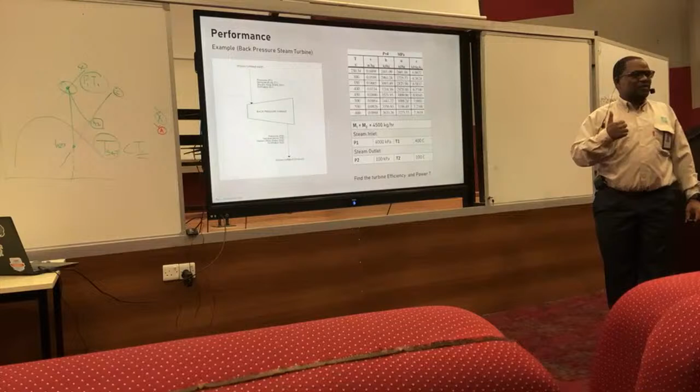Once we have that, we can plug it into the equation and calculate the efficiency. Once we have those enthalpies, and since we've been told the steam mass flow, we can calculate the power, because power is m dot times delta enthalpy. That gives us the power of the turbine. This is really the concept of how you determine the efficiency of a turbine using these thermodynamic principles.

So far, so good. The intent at the beginning was to go into detail with you, but for the sake of time, I thought we could still deliver the concept of how the whole thing works, and later you can check and verify the answers yourself. So I've given you a recipe for how to solve it, and I'm sure you're familiar with it, okay?

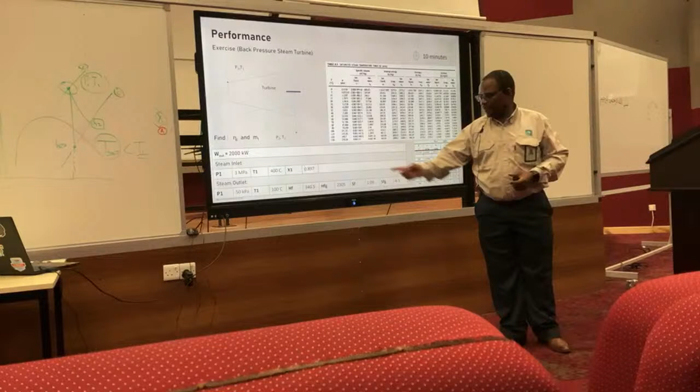Do you want to give it a shot quickly, so whoever gets the answer first gets the chocolate? Let me explain what's been given on the turbine — it's the same turbine sketch as before. We've been told the inlet condition is 3 MPa, that's the boiler pressure, and we're given the temperature from the boiler, the steam to the turbine, and the exhaust pressure of 50 and the exhaust temperature. We're being asked again to assess the performance of this turbine and work out the efficiency.

Is it the efficiency this time? Where is the question — yeah, sorry, it's the efficiency and the mass flow rate. The previous one was mass flow given, efficiency asked. Why this one is mass flow rate asked? Because fortunately we know what the shaft power is — the power is a known quantity. What we don't know is how much steam the boiler should provide to the turbine.

Somebody want to give it a try? If something isn't clear on the given parameters, let me know, I'll call them out quickly so you can flow with your calculations. I tried to bring the enthalpy values to help you — saturated and superheated data I have, and if something is missing, you can quickly make an assumption. So long as it's a good engineering assumption close to your knowledge of thermodynamics, we can give you the chocolate. We're not marking right or wrong answers, we're looking for the concept, the fundamentals.

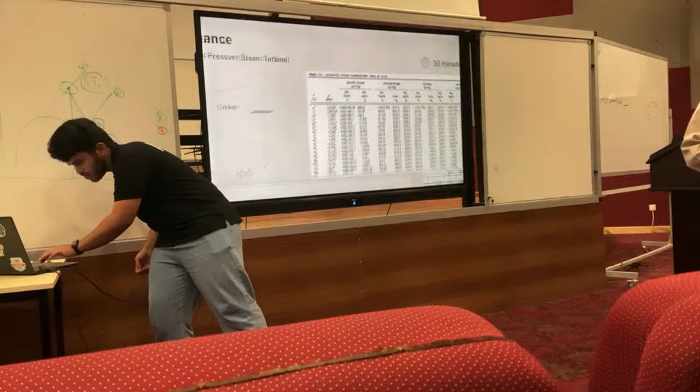Is there someone close to an answer? Regarding the first state, it has X while it's superheated. Does it make sense? It has X while it's superheated. Explain to all of us, what do you mean it has X while it's superheated? X means it's saturated.

Can we all see? So you're not happy that you're getting X before you even go past the saturation line? I'm past the saturation line. Why do I have X? Yeah, you are in the wet region. The superheated region. You are in the superheated region. Yeah, first state, the inlet to the turbine from a boiler.

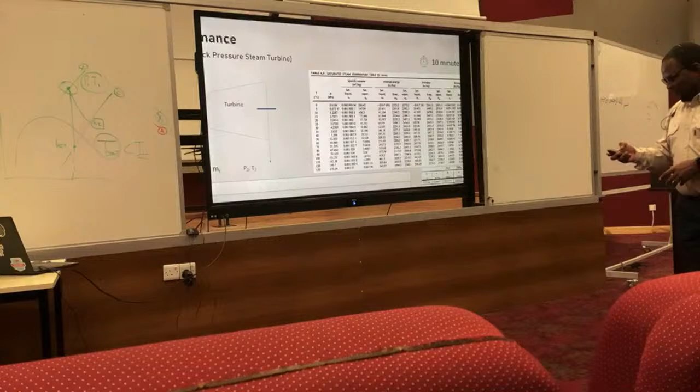Where are the parameters? If you went down, from the boiler you got 3,000 kPa, 400 degrees. You're saying you're getting X in this inlet condition from a boiler. This is superheated region. Yeah, so I shouldn't have X. You shouldn't have X. So why is there X?

Or no, X is a number, sorry. Now I understand the question. I've calculated that for all of you. So when you go to the wet region and you're looking for X, don't stress, I already worked it out for you. I just wanted to speed up the assignment. But that X is not related to inlet conditions.

Yes, it's X2. It's not X, it's the X for the exhaust conditions. So when I was preparing the data, I should have moved this X to these conditions, because it's not related to these two parameters. These are high pressure, high temperature, straight from the boiler. Should never have X. Oh, you gave me a fright, I almost.

This is high pressure from the boiler. It should be still up there on the superheated region. He's correct, I mean I confused him where I placed it. X is already calculated for you. You can just plug that number and we'll quickly discuss the solution. So all the other parameters, I quickly went through them to speed up the assignment. You should give me a chocolate as well.

All right, I think we're doing well. Is there anyone who wants to explain even 2 or 3 steps that you attempted? Even upstream of the turbine, P1 and T1, you already defined something, you want to share with us? What was your H1? This is quite, you get points for this. What was your H1?

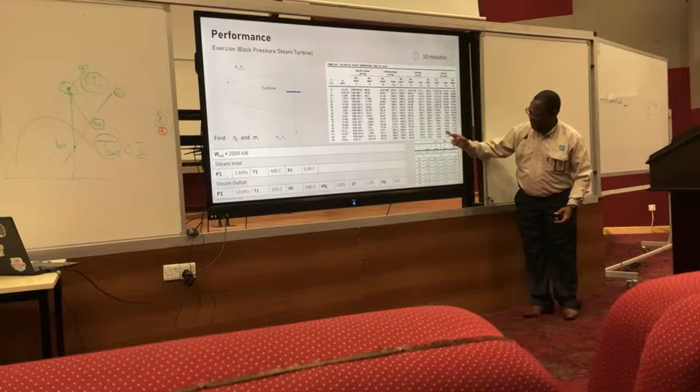Okay, the pressure is 3,000 kPa or 3 MPa. So the enthalpy is here. Search now what is H1 from 400 and the 3,000 pressure from the boiler. You can quickly read now what would be the H1. Anybody manage to find H2? You find H2? Yes. Share with the team, how did you find it?

hf plus x hfg. That gives you H2. So it gives you this value. Yes, and you use X. Okay, hold the thought. Who wants to comment on what he's saying? He's saying, I have found the actual enthalpy for expansion in the turbine, but I use the dryness fraction and the wetness of the steam.

Is he correct? He found H2S actually, that's what he meant. You have found this point. Very good, and you use the dryness factor to find this isentropic enthalpy. Okay, he deserves a chocolate, and him with the H1, we can give them a chocolate.

Let's wrap up because of the time. Really, it's not to test you how much you know, I need to be very clear. It was just for all of us to recap on the fundamental, the importance of applying these properties to work out the steam turbine efficiency. I'll show you now the solution quickly.

So here's the solution. This is what you should have got as an engineer when you tackle this job. This is what should be in your engineering report. I've done the turbine calculation, this is what I found. There is a mass flow rate. These are my parameters. And this was asked because you already knew what was the shaft power available.

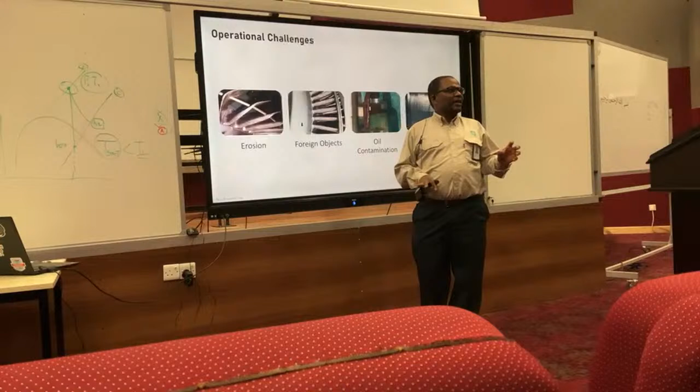I have some pictures. He just said water. So this one is not water, something that shouldn't be, that was not supposed to be inside the turbine. It finds its way into the turbine, and this is the damage it causes to the blades. We call it foreign object, linking to the good answer he just gave - water at high velocity can erode the blades. It's not that the turbine cannot work.

Again, you start seeing the performance of a steam turbine decline. That's how engineers make a judgment and ask why the performance is declining - are we having liquid now in the steam? So when you're an engineer monitoring steam turbine parameters, you need to always ask yourself, when you develop your tools to monitor the turbine from the boiler to the turbine, your eyes don't move away from these parameters, because when T1 drops below the saturation temperature, you need to tell the operator we are now not getting steam into the machine, we're getting water into the machine.

Somebody had a question when I was explaining, let's go back to the pictures, sorry. I'm just showing you typical challenges now in the field, this is what we deal with in the field. Steam quality is very important.

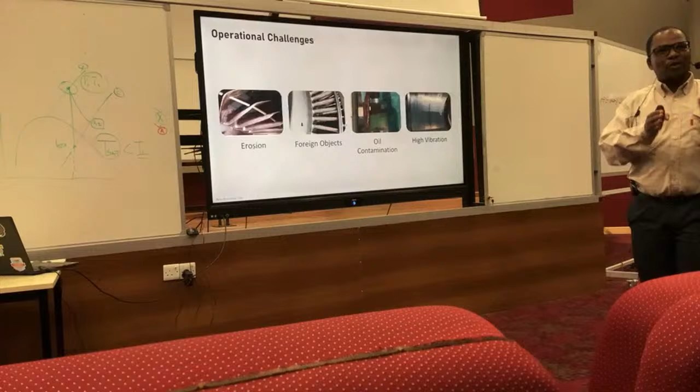Siemens, GE, when they design a turbine, they will tell you straight away - you can open their manual, that's where they talk about steam quality. When you have a new steam turbine and are commissioning it, the first step to introduce it into operation is what you call steam blowing. Steam blowing is cleaning the process from the boiler, cleaning all the pipes from the boiler, but we bypass the turbine. We don't take that steam through the turbine, because if we do, this is damage we can cause on the brand new turbine before you even start it. So we do steam blowing - it's an engineering or international standard to clean the steam.

Siemens or GE will have something called a target blade, where every time steam at high velocity passes that blade, when we stop a blow cycle, we pull the blade and inspect it. We agree that the impingement marks on the blade are not a certain size, not visible to our eyes. If it's still visible, you fail the blowing and repeat it. Why? Because there's money invested in a steam turbine, you don't want to damage it, right? So these are the things that in industry we all face when you join us - you need to make sure your steam quality is right.

That's one aspect. The other aspect is steam quality in terms of chemical treatment. It's very important, because when the blades start having silica or conductivity issues and it starts becoming high, you're scaling up, building fouling on the blade, and the efficiency of the turbine drops. Then the compressor guy complains, I can't get the flow rate through the compressor - what is wrong with this turbine?

Someone is responsible for sampling and treating the water and steam, making sure the steam is correct so the turbine can deliver the torque. These are things you'll deal with in industry: lubrication for the bearing, oil quality, forces, high speed. When oil isn't clean, particles can rub the bottom of the bearing and scratch the shaft. Also, vibration caused by water or moisture in the steam, or incorrect steam setup, can damage the journal and the sacrificial babbitt layer on the bearing, causing turbine and bearing issues. These are the challenges we deal with day to day in the field.

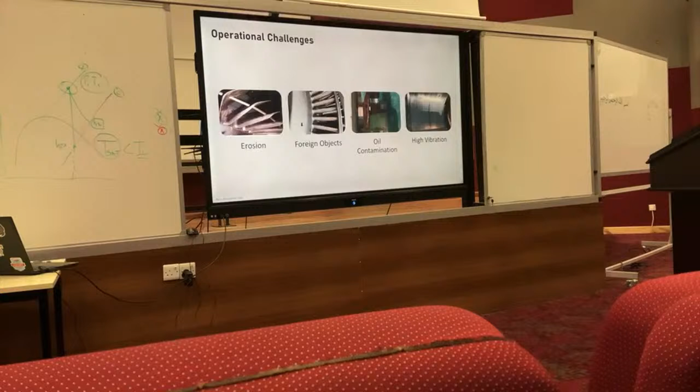Anybody else want to check in? What we've covered today is far from the complete knowledge of the steam turbine, but the intent was to start together with the basics and fundamentals and relate them to your career. I'd like to leave you with challenges. I've already given you one: how do we work out the efficiency of a turbine on each stage, not oversimplifying by just looking at inlet and outlet? We're still looking for someone who can bring this intelligence to the industry. I'm looking at you, inshallah, to come in the future and help us.

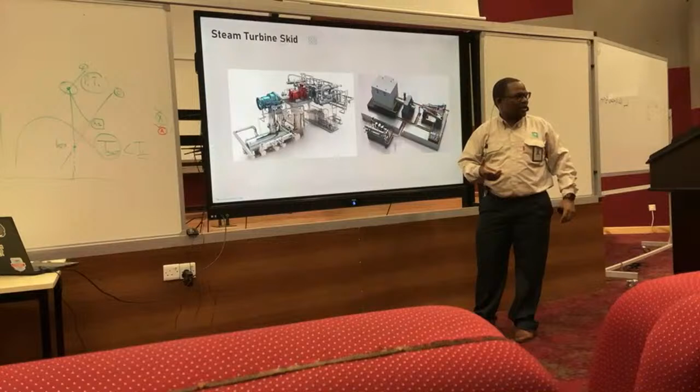Very quickly, to give you an idea of what you'll see walking into the plant as an engineer, here's a layout of the turbine. This is a lube oil system. Here's your turbine on top. We use oil to lift the bearing and support the shaft against the hydraulic forces, so the lube oil skid handles that. This is the generator drive, this is your turbine, this is a gearbox. Sometimes the torque or speed produced here is higher than what the generator requires, so we bring a gearbox for reduction to give the speed needed. For electricity generation at 60 hertz, you typically need 3,600 RPM, and that's how power plant generators work. Everything else around is auxiliary equipment supporting the system. We wanted to show you a skid layout on site: the turbine is always on top on the foundation, and the lube oil system is on the bottom.

Thank you very much. I hope I've engaged you and given you a flavor of the subject. It's impossible to cover everything about steam turbines, but I needed to share the fundamental foundation of what lies ahead of you. That was really my intent this evening, to engage with you and exchange this knowledge. Thank you very much for your time, it was a pleasure.